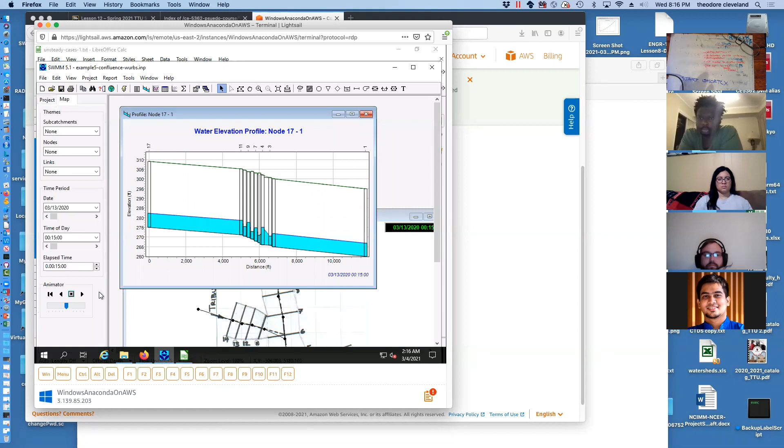It doesn't have the profiles built yet. I didn't know that didn't save the profile. That's kind of weird. We'll just do the main channel profile. And that looks like it did last time. And as we run through simulations, that's what the profile looks like. And here's what I mean by the stable. So we should have a value of 5,000 plus, looks like 1,250. So you see the wiggliness, that is fairly typical with an unsteady model.

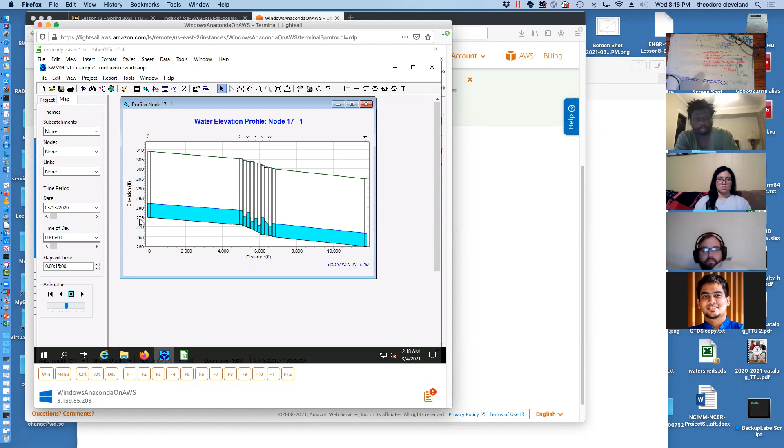Watch what happens when we change the outfall condition from free to normal, and I'll rerun it. It's making a fool out of me with you all watching. Because before I finished this last time, as you recall, everything was all over the place. Okay, so we could play with the downstream boundary condition. We'll notice that this last node, which is our outfall node, is roughly 2,000 feet away from the area of interest. And so we have a pretty long run out in this case.

So now let's go ahead and turn it into an unsteady model, because that's the whole point of using these kinds of softwares. So what we need to do is we want to change the input, in this case, from just a steady value to some time series input. And it looks like it has a few already stored with the input file. So let's just take a look at what they look like.

And so here's one that starts at 2,000, goes up to 4,000, then up to 5,000, and then drops back down. And I don't really know the origin of that one. Let's see if it, oh, it's this hydrograph, right? No, it's not that one. Goes up to 4,000. It looks like it starts at 2,000, gets up to 5. It may not be any of the examples.

Starts at 2,000, gets up to, well, it's none of these. Let's go ahead and we'll go with it for the time being, but then we will go ahead and insert at least one of these hydrographs into our simulation so that we have it available.

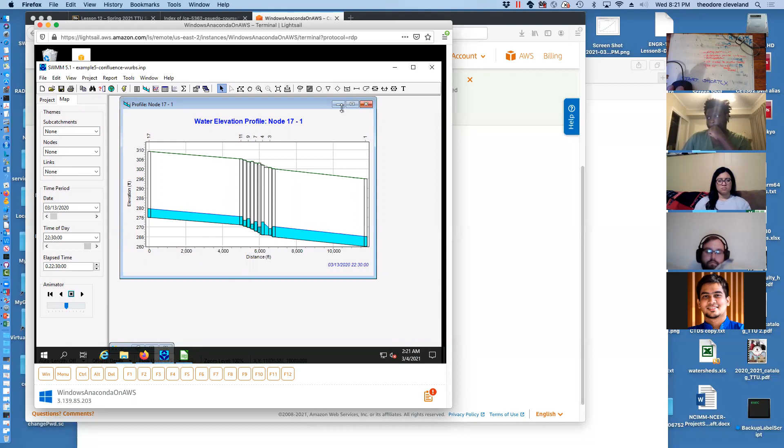In terms of water surface elevation, it's actually not terribly interesting. But if we were to examine the flow, we'll pick that particular conduit. We should get a hydrograph representation. And to some extent we do. The hydrograph comes up, and then finally the last 50 hours or so is a flat line, which is consistent with what the hydrograph looks like.

And in a practical engineering sense, we would probably run something like this if we're interested in what's going on in these two peaks. So let's turn on the other transient hydrograph, and see what it does. I will keep that graphic up. So now we will change junction 16 to use its time series. It's already stored there. And we can go take a look at it.

So it's a hydrograph of a similar pattern, but it's starting at 500 and only peaks at 1300. And then comes back to 500. So our long-term simulation should be 2500. So we'll keep that one there, and let's get the other one. See, that one's down here. I'll pick this location right there because I want you to be able to visualize the different hydrographs.

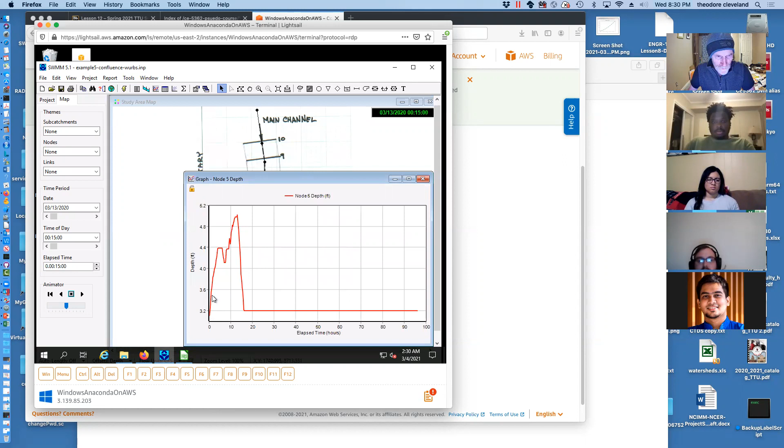And so here we have the two hydrographs combining. And if we were to go to our location of interest, so I'm moving these to make real estate to find, there we are. We're probably interested in that junction, which should be on the upstream side of the bridge. And so at the highest flow, we have a computed depth of almost 5 feet. And so if we were to look at the bottom elevation, 266 plus 5 feet is 271, which is well below the 295 feet, which was the bottom chord of the bridge that we are investigating.

If we go to the point downstream of that and look at the same information, we're at 8, let's call it 9 feet so I can do the arithmetic in my head. We're at 9 feet and we're at 266 plus 9, which takes us to 275. So as far as the bridge is concerned, our system is quite capable of conveying these flows. And if we recall, I think I modified the conduit to have the abutments. If I can remember how to drive the program. Yeah, this has the bridge abutments. So we're at 279. So at this particular flow rate, our depth is somewhere right about here.

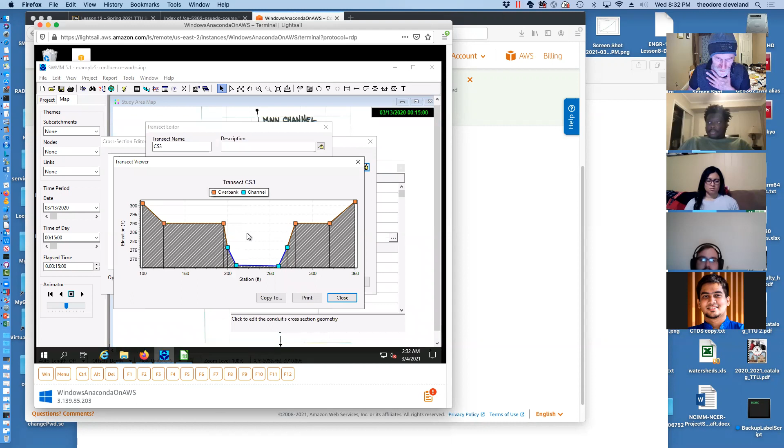Now, if you've used HEC-RAS, it's a different tool that does kind of the same thing. It's totally targeted for showing you what the water surface is at a cross section. That's what it's built to do. And so it draws this picture with where the water goes. Whereas the SWMM model was originally intended for a slightly different use. They're both adequate for this kind of case.

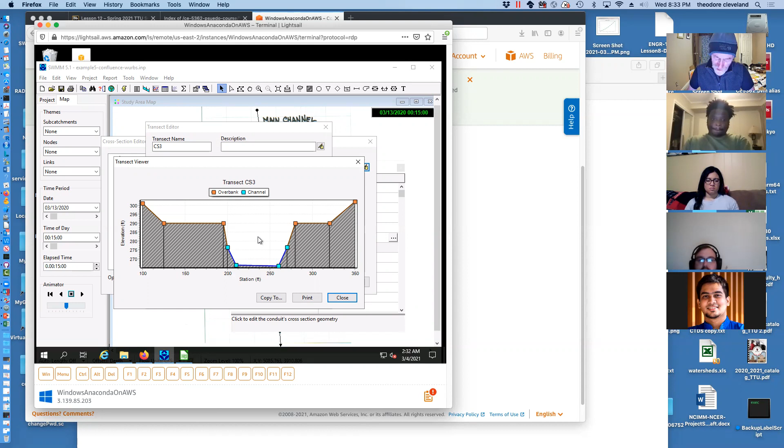What HEC-RAS is not adequate for is once we start putting conduits into the system. It has a culvert package in it, but trying to simulate a dendritic drainage network with subsurface conduits in HEC-RAS is a fool's errand, and I would suggest that you don't want to do it. Whereas trying to simulate riverine systems with SWMM is doable, although it's not the best tool to do it from an end user or model building standpoint. But I selected it for this class because eventually we're going to integrate some hydrology into it. And I assure you, HEC-RAS does not do integrated hydrology well at all, whereas SWMM was built to do it.

Okay, so that's enough of my marketing pitch for the SWMM model. Let's continue with the example and go to the trouble to create a different input hydrograph. So let's say we want to make a new one.

To do that, we put a blank there, and then we click on the edit, and that brings up a new editing window. And so what this will do is it lets us create a new hydrograph. So we'll call it section 10 because that's where it is. But we need to give it a different name than the other time series. Otherwise, we'll never be able to tell them apart, and it won't work.

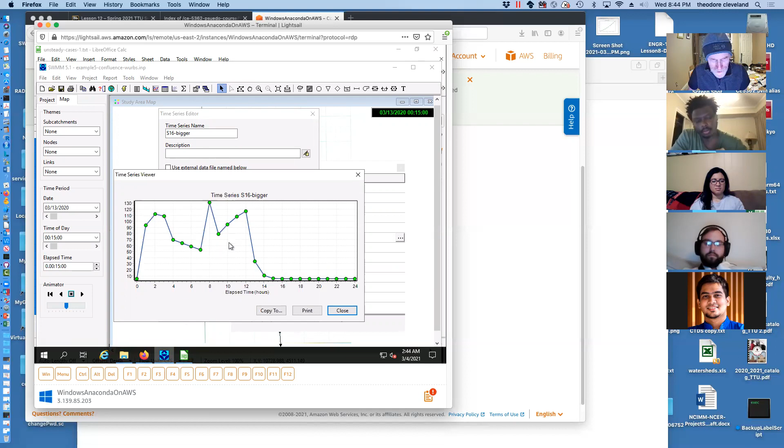Go back to our parsed data file. Copy that. Hit paste. Damn it. Practice our profanity, because as a computer modeler, you need to do a lot of profanity. We will now copy the correct data. And hopefully it will let me clobber what's already there. Oh, that was too easy. And there is the other input, and this is clearly some direct proportion of the S10 bigger.

Oh, crikeys! I didn't save it. That's the other thing that will happen from time to time. S16. So cancel and OK are a little bit too close to each other, and that happens from time to time. I must have hit cancel.

Based on the TV news, that makes me a leading member of cancel culture. That's why I did it. Oh, come on. That was actually funny, guys. I should at least get a courtesy chuckle out of it. The computer has canceled me by not copying.

Time series name, S16 bigger. Hit OK. Hit OK. And now we have the 2 time series, and then running it is at this point trivial. We hit the lightning bolt, we wait, and we look at our outputs, and they should look similar in shape but different in magnitude. 12, 11. Yeah, this is the... So this is the one that still kind of looks like the cat. Here's the upstream one, different magnitude, and we've now combined the 2 at the downstream end.

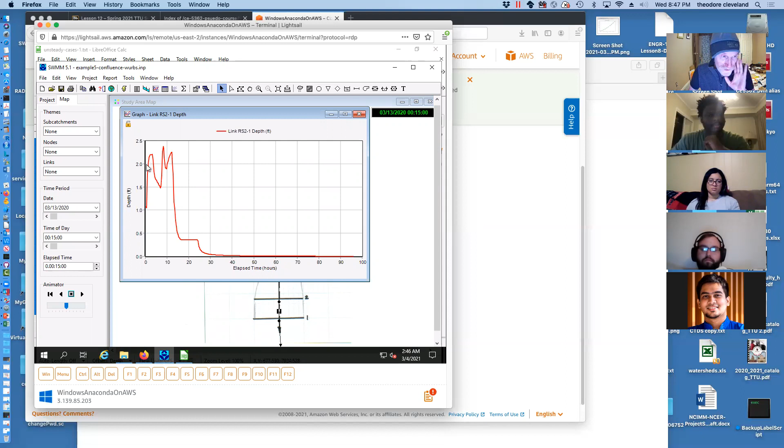change the object to depth, choose the okie dokie, and it's now telling us depth above the bottom of the channel. So somewhere 2.5 feet, and that would mean that it is 2.5 feet above 265. So at that particular portion of channel, we're at 267 feet for the water surface elevation. Hopefully that was the channel.

Yeah, there's the conduit. We're at 267 feet. And I wanted to go look at the actual picture of the channel. Okay, so click on that. There we go. So our flow depth is mostly everything's contained down in here. And that makes sense because that particular hydrograph was relatively small compared to the other examples.

So now let's go ahead and hit it with the really big hydrograph, which is stored as unsteady cases 2. I think at this point, we're almost to the point where you guys would be able to build one of these on your own if you had to. And we will create that opportunity in the near future. So we will download unsteady cases 2, and we already have figured out a way to open them, which is go into Calc.

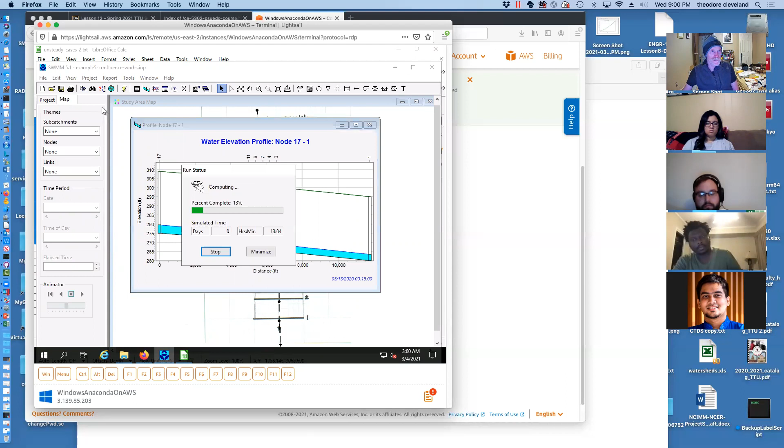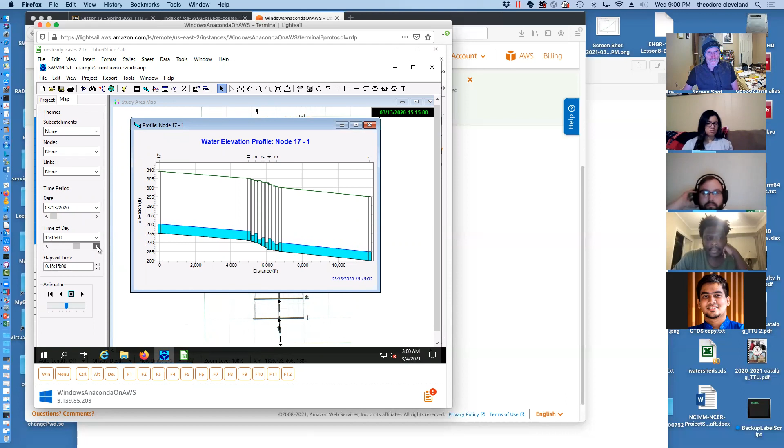So there's my cross-section profile. As I recall, this is not a very big flow rate, so we barely even see any change in it. Make sure I ran it. I did. So the water comes up a little more, wiggles around a bit, and it's done. Okay, well that constitutes a demonstration of this particular problem.

Now let's go ahead and really challenge the program with some decent flows. So I'd say let's make these things 10 times bigger. And that is easy enough. Little tricks with LibreOffice. So now I've just made that column big enough, and here's the trick I'm going to play. I'm going to copy that, go here, choose paste special, and

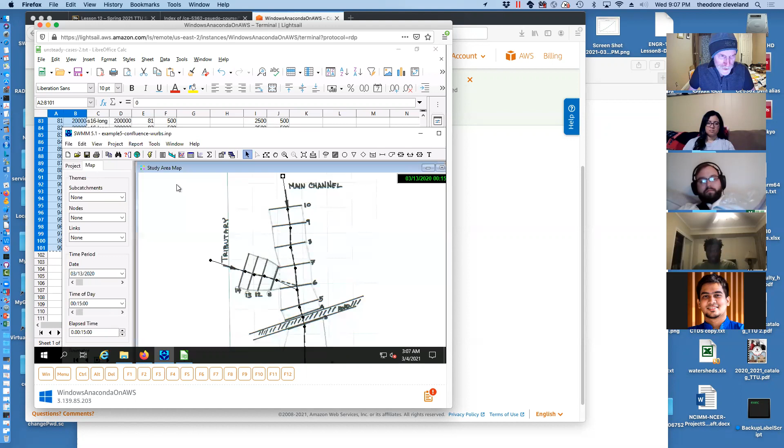Oh, I killed my, let's just pick one of these conduits. Let's look at the flow. Sure enough, there's pretty substantial flow up to, I thought those would have been 20,000. Maybe I, that's weird. Maybe I put it at the wrong place. unsteady cases 3.

And after this, we're pretty much done with this particular problem, and you've seen an example. And then next time, we're going to do a tributary that's physically larger. But we've now set up the conditions, or how you actually build one of these, which was my point. And hopefully that actually now has some substantial flow. Yeah, there we go. That's what I'm after. So now we've got, at some point, we have 45,000. I think this is in cubic meters per second.

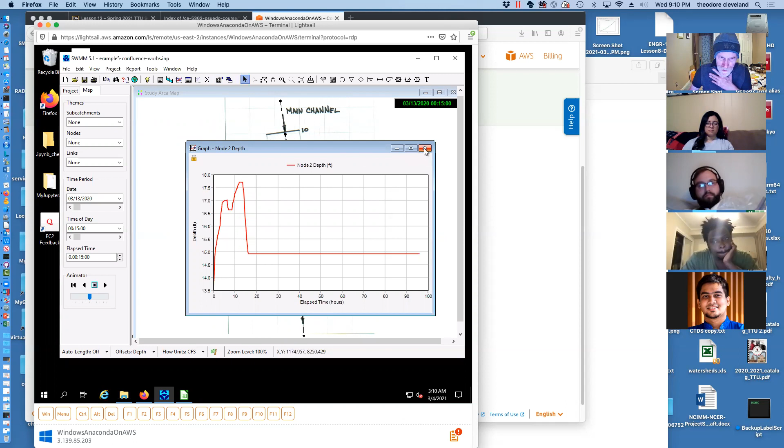Oh, that's why nothing was working right. It's in the wrong units. Oh, and now it's got to resize the window. I'm sort of laughing at it, but I'm also kind of really, oh, you know, cubic feet per second is the right units. I've deceived myself. Let's go look at the flow depth at this last location. So we're now, you know, getting up to 18 feet of flow depth, but that's out there in the open channel. That's not a big deal.

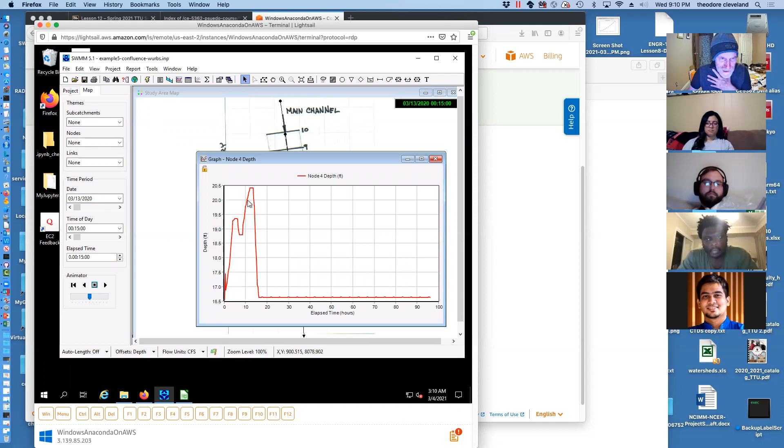Let's look just downstream of the bridge. So that's over 20 feet. And if you recall, our 290 feet was our magic number. So 266 plus 20 feet is 286. So we're just barely making it under the bridge. There's only 4 feet of freeboard.

So if you were in your inner tube with a cooler full of beverages floating down this river, you'd be a fool. But you'd only have 4 feet between the bottom of your butt and the top of the bridge. And so if you were to sit upright enough in that inner tube, you would become the headless tuber. So that's how we use a tool like this.

So are there any questions on this? Otherwise, I'm going to save this input file. And I'll put it back to the server because it's just saved locally right now. And then next time we're going to look at a very similar problem, except we're going to move to a different location. It'll be a real location in Houston, Texas, and we'll have real hydrographs, and we will actually basically try to re-replicate the problem. And then we're going to move into quasi two-dimensional overland flows.